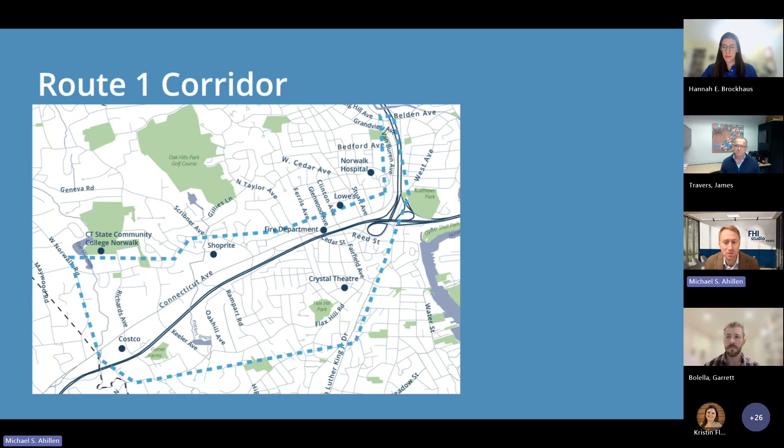Whenever you do a study like this, and you do a corridor study, you need to be considering how the recommendations on a particular corridor might spill into the surrounding network. So there is a greater network which is outlined in the blue dashed lines, but by and large, we're really focusing on Route 1 in our conversations tonight.

Throughout the study, we've really been looking at the public feedback, whether we've received it online or through email or in-person events. We did have a project advisory committee, which met 4 times. It was made up of leadership from various city departments, as well as the Connecticut Department of Transportation and the Norwalk Transit District.

We did a lot of business and transit outreach. We reached out to more than 70% of businesses on Route 1, which is a lot of businesses, I can tell you that. And we spoke with a lot of transit riders who are historically underrepresented at public meetings. We wanted to make sure that we had their input on this because they're key stakeholders for the corridor.

We also did a bus and walking tour where we got a pedestrian perspective of the corridor. This was a really important opportunity for stakeholders to really understand not just what the challenges of the corridor are, but really what some of the opportunities are as well.

We had 2 public meetings. Both of these were in person at Jefferson Elementary. We had the kickoff meeting way back in May 2024, where we initially collected input on some of the challenges facing the corridor, as well as the goals and vision for this project.

And then more recently, in March of this year, we had our public workshop, which was the first opportunity the public saw of our concept drawings, where we focused in on a few different areas and gained some feedback. I want to really note that both of these meetings were extremely informative and resulted in some pretty substantial changes to how we thought about this corridor and how we developed it for this planning document.

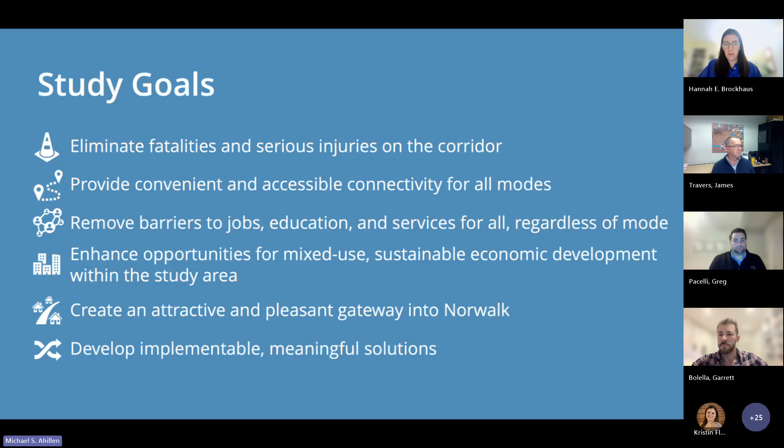And then last, and certainly not least, is developing implementable and meaningful solutions. Implementable meaning something that's really feasible, something that can result in lasting change, and something that works within the design guidance that has been provided for us and adheres to national best practices in street design. So there's a lot of different study goals wrapped into this, which is what planning is really all about.

These are planning level concepts, and there are some considerations I want you to remember as we're showing these. They were developed through extensive existing conditions research. We collected a lot of traffic data and did a lot of signal work. We also gained a strong understanding of the issues, opportunities, and community concerns by meeting with the public and key stakeholders over the last year and a half, almost two years.

We use turning templates for appropriate design vehicles, which is an engineering way of saying we're designing for all vehicles using this roadway. So we're not just thinking about people driving their own vehicles, but we're thinking about public transit, school buses, box trucks, delivery services. Some of these require larger turning radii, which is something we've incorporated into the design. This is something we're required to do as part of the Connecticut Department of Transportation's design criteria, which we've incorporated as best we can throughout the study.

There are general topographical constraints. Unless you've walked or biked the corridor, you probably think of it as being relatively flat in some areas. The reality is that there are some topographical constraints that we need to be thinking about.

We're trying to limit right-of-way expansion to the extent possible. Just so it's clear, we're not looking to expand the roadway in any way. There are locations where there is potential property impact in the long run, but that's something that would need to be worked out in the future. The roadway itself would maintain the same width that it operates in today.

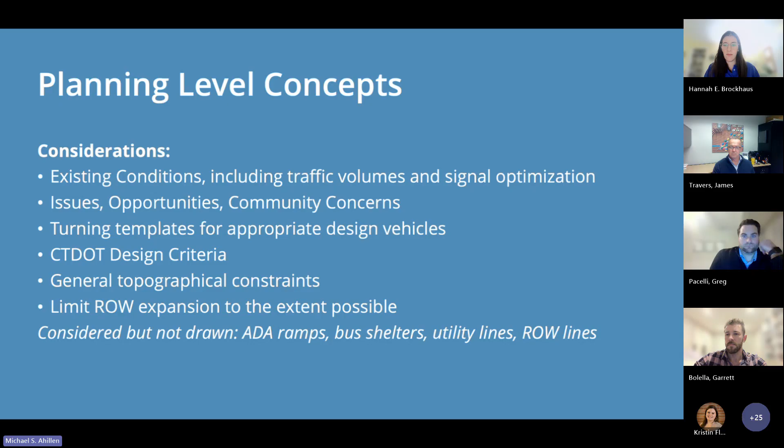As we look at these drawings, you may notice ADA ramps for wheelchair access and stroller access might seem like they're missing. Bus shelters might seem like they're missing too. Just know that they're there, they're just not always drawn. For the sake of clarity, we wanted to keep these drawings as clean as possible. But we'll be integrating ADA access and transit comfort to the best of our ability as projects get implemented.

All right, so let's switch to the recommendations overview. So this is the corridor. On the left, we have Richards Avenue, and just beyond that is the Darien town line. That's the western extent of our study area, going all the way north past Belden Avenue to the Spring Hill intersection. So this is the corridor at a glance.

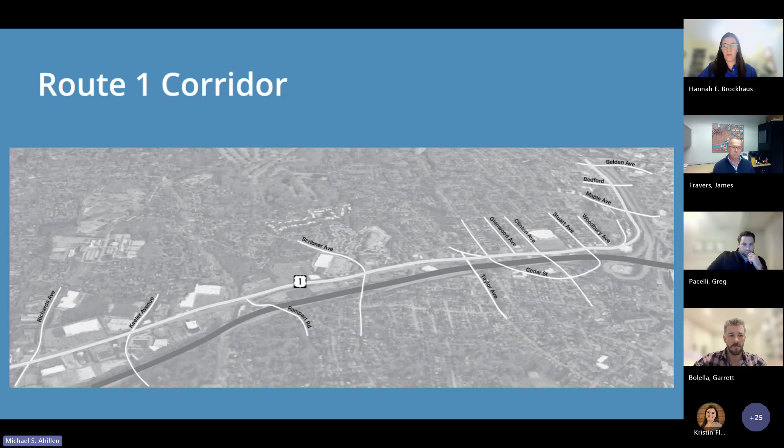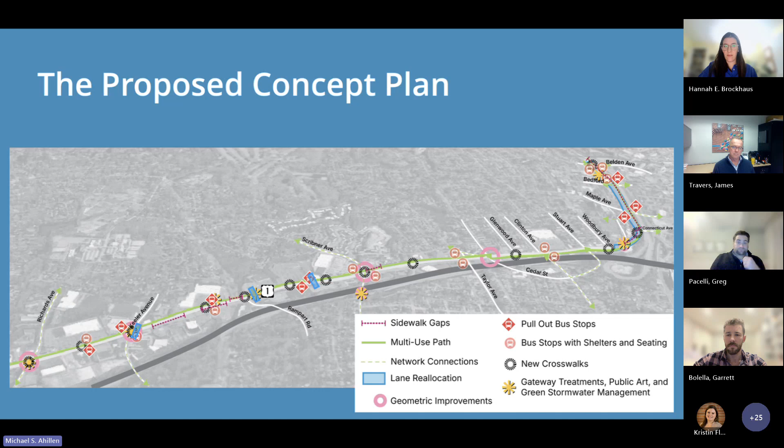This is all of the recommendations thrown onto a single image. As you can see, everything from addressing sidewalk gaps to creating a multi-use path, to transit improvements, to crosswalks, to geometric improvements - all of these are really integrated. What's not shown here is a really important component we'll provide in more detail: the modernization of signals, which is really making a lot of this possible.

So let's start with the pedestrian network expansion, and we'll go mode by mode to make clear what we're doing here and what we're proposing. So, closing the sidewalk gaps. Generally speaking, most of the corridor does have a sidewalk on at least one side of the road. However, it's not complete, so this study is suggesting that we really complete that network. In some areas, it's easier than others.

One of the most challenging areas is just west of the Rampart Road intersection. There's a small but significant sidewalk gap over a creek that would require a new pedestrian bridge to make that accessible. This work is already underway, with funding already started rolling, so it's a nearer term solution for closing that critical gap where people currently walk in the shoulder instead of crossing the street due to the lack of crosswalks.

On the note of crosswalks, you'll see those dark dash circles throughout. Crosswalks are being added wherever possible on this corridor, at almost every single intersection, if they aren't already there. We're seeing a lot of people cross mid-block, frequently at locations without crosswalks, so we're addressing that through design, allowing for more crosswalks so people can cross more safely and avoid mid-block crossings.

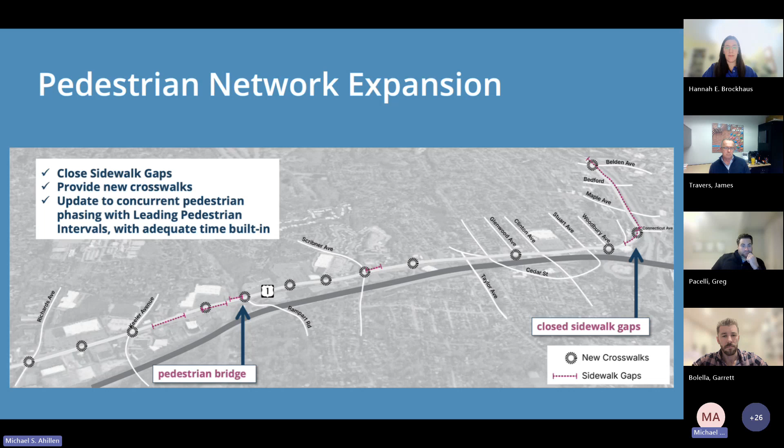What's not shown on this graphic is something called a leading pedestrian interval. These are important, proven safety countermeasures that give pedestrians a little bit of an advance before vehicles start moving to cross the street—maybe a 3 to 5 second head start before vehicles are in motion. This is a really important safety improvement, and something only made possible through the modernization of signals on the corridor.

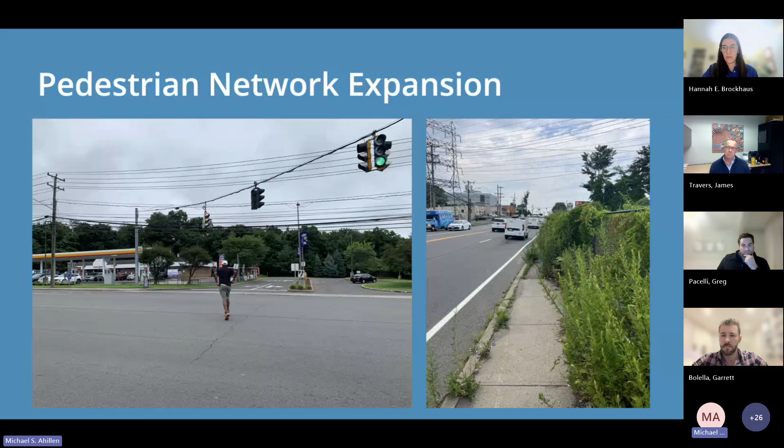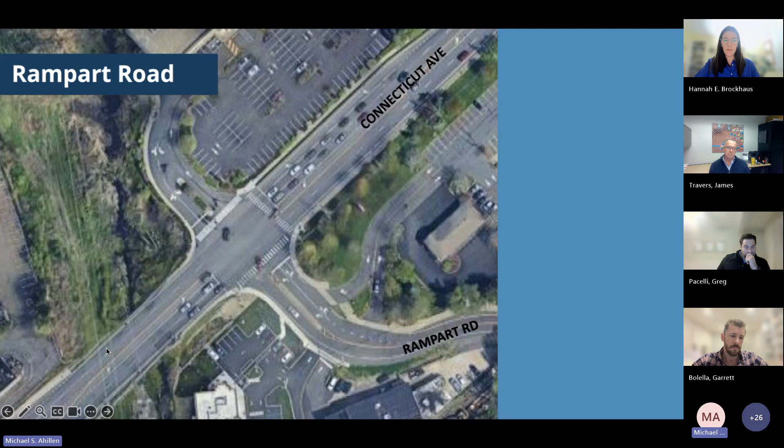This would be addressed through a pedestrian bridge. There's a creek here—even though you might not realize it, this is actually a bridge right here—so putting in a pedestrian bridge would close that gap. Also note that we're adding a crosswalk here, so there's a crosswalk at all 4 legs of the intersection.

And then something you might notice if you have really good eyesight is this right here expands the sidewalk into what's called a multi-use path, so it would accommodate both cyclists and pedestrians on this section of the corridor.

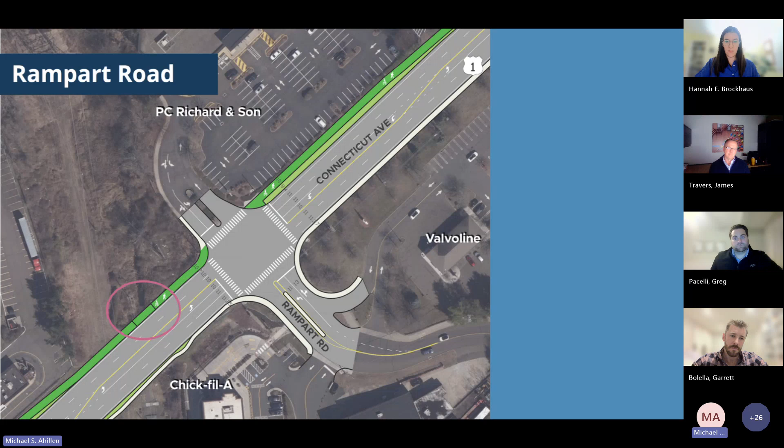So on that note, let's go over to the bike network expansion. One thing I want to pause on here and talk about briefly—if you came to the workshop, and I saw some familiar names who joined us tonight, your advocacy at that workshop really helped shape this plan.

We had read in previous planning efforts a suggestion that cyclists should use Flax Hill Road or some other roadway to go east-west. Although many cyclists will choose that, every single time we were on the corridor we saw cyclists—almost every intersection where we collected data, we had cyclists going through. So we know there's documented use of cyclists on this corridor.

Your advocacy at this meeting pointed out that cyclists need this corridor for the same reasons that drivers do. There are a lot of destinations here—your grocery store, your hospital, your elementary school—a variety of destinations you need to reach on two wheels, in addition to, not just on four. For this reason, we decided to go back to the drawing board and really look for ways to bring bicycle infrastructure to the corridor.

That's how the multi-use path really came to be. In some areas it's a lot easier than others—I'd say the eastern portion, where there's lower traffic and public right-of-way, is where providing a multi-use path is more feasible in the short term.

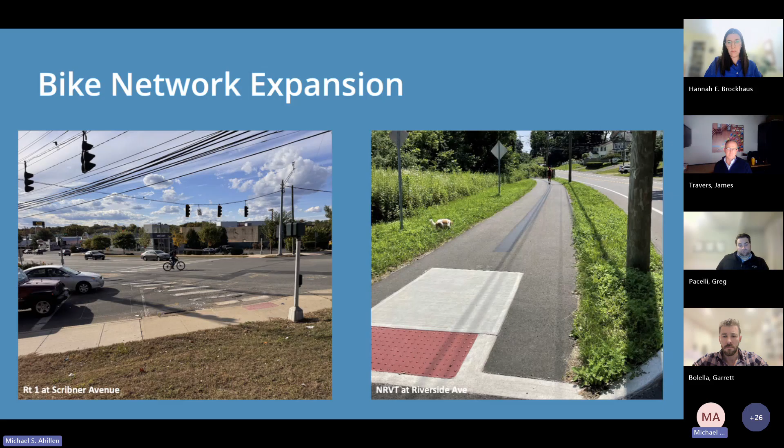Alright, and we'll talk about transit before we switch over to drivers. So improving bus stops, this corridor is really highly used by transit riders, so we're improving bus stops with shelters and seating at nearly every location. There are a handful of locations that are just too constrained, but certain improvements can still be done there.

Optimizing the bus stop locations is something we noticed in the Norwalk Transit District's latest work in their redesign of the network. Some of the routing changed, so we're designing with that, but they also provided guidance about how frequently some of these stops should be spaced.

We're also working to bring those stops closer to the intersections, because what we heard from transit riders is that they frequently have to run across the street when there's no crosswalk just to get to the most direct path to the opposing bus stop. This can be really challenging and presents some safety concerns. So by bringing the bus stops a little bit closer to the intersections, particularly where there are crosswalks, pedestrians and transit users will be able to cross Route 1 more safely.

Another component not on this graphic is the signal component. There's the opportunity for transit signal priority. If you're not familiar with what that is, basically if a bus has passengers and is running behind schedule, it will extend the green or the yellow so the bus can get through and not be stopped at a red light unnecessarily, allowing it to drop passengers off. This can go a long way in improving transit reliability with minimal impact on vehicular operations in the area. It's a really exciting opportunity, and it's something that's already being looked at within the study area.

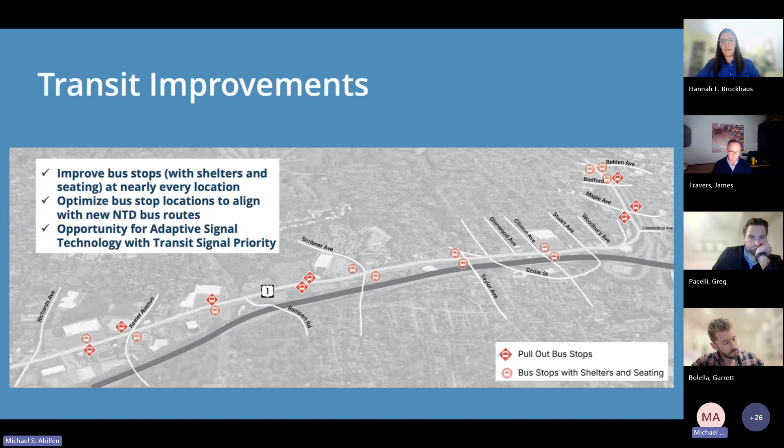Alright, so if maybe you don't ride transit, maybe you don't walk, maybe you don't bike, but you do drive on the corridor, I'm going to hand it over to Hannah, who's going to talk about some of the improvements to traffic operations.

Hi, everyone. Oops, wait, one more thing. Yep, sorry, I forgot about this one slide.

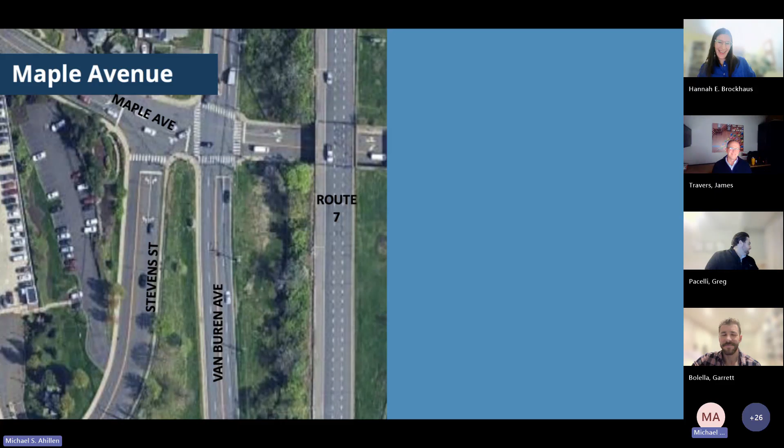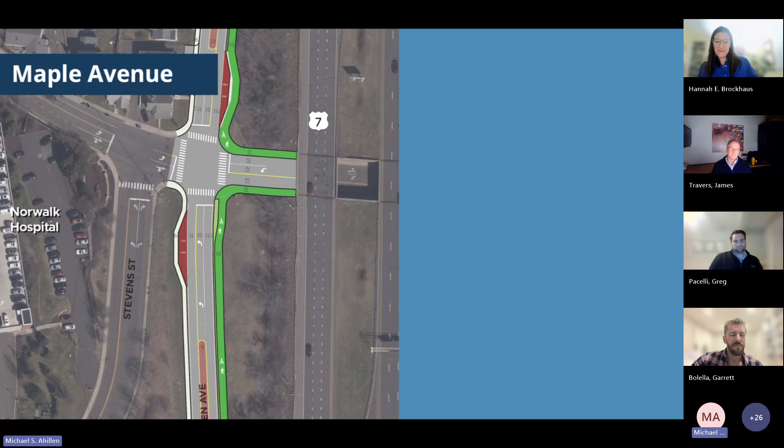So one other thing we're looking to implement are these bus pullouts. Here's an example at the Maple Avenue intersection, which is one of the more popular stops because of the location of the hospital. You can see some dedicated space for bus stops at this location. So sorry about that, but go ahead, Hannah.

That's a great note to end on, because what I want to emphasize from the beginning is that this corridor is, as we've been saying all night, a complex corridor. It manages a lot of regional destinations. It's really important for the city, and all of these important city corridors cross it.

So the series of sections I'm going to walk through—forgive me for going into a little bit of detail despite it being almost 7 o'clock on a Monday—but I want to illustrate the improvements and the close looks we've been able to take at these locations to fine tune what is out there today and allow the roadway network to accommodate more use and more multimodal users without compromising operations for traffic and drivers.

So firstly, from a roadway geometry standpoint, the way the road functions, Route 1 has changed dramatically over the last 50 to 100 years, as increased big box retail has transformed the western portion of the corridor, and as volumes on the city's north-south network have increased in scale and importance.

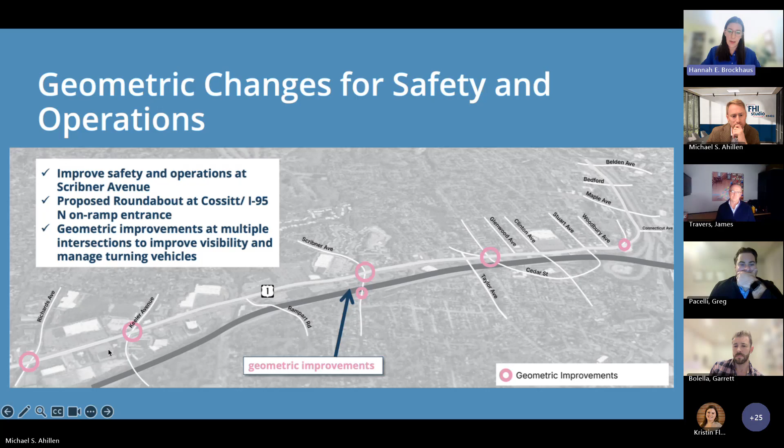This has been really important throughout, but the best example is Scribner Avenue, which is an important regional destination in and of itself because of the traffic flows that use it to get where they're going. There were a huge number of crashes along this corridor, as Michael alluded to when discussing our goals for the study—Vision Zero was our first and foremost design element here. Scribner Avenue wasn't just the top crash location on the corridor, it's among the city's top crash locations overall.

So this was an extremely important focus for us, and we're able to achieve a lot with our concept. I'm not going to go through the full list—it's on your screen—but I'll focus on a couple of key things that make a huge difference, starting with those first couple of bullets.

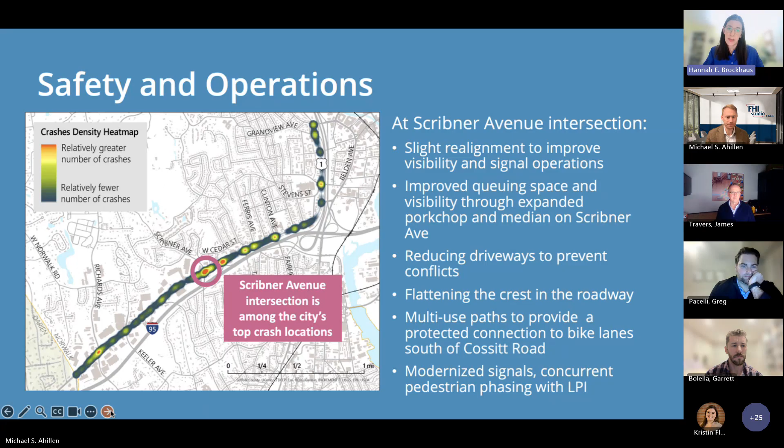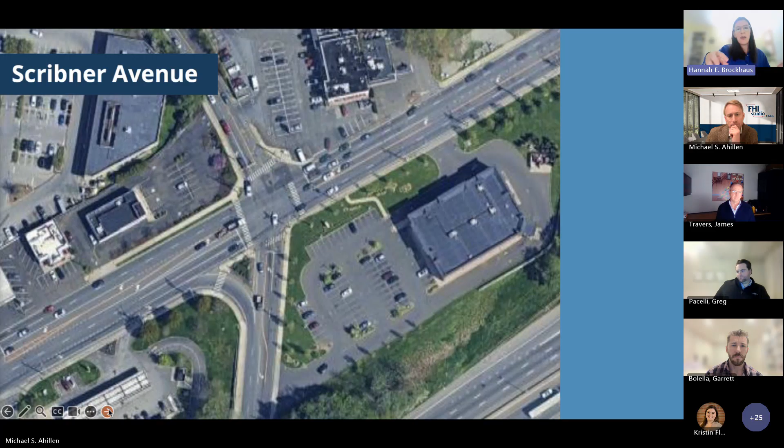One thing you might not necessarily notice driving the corridor day to day, especially if you're passing through and not turning, is that the Scribner north-south alignment presents a skew that makes it more complicated geometrically to accommodate all the modern traffic movements within the signal. That also confuses the turning movement geometry and presents some safety challenges.

So the first thing we prioritized with this design is to slightly realign the intersection, making some of the opposing movements able to operate at once within the signal cycle. That frees up a lot of time so we're able to do more with the rest of the signal cycle, making the whole signal work more efficiently.

The second item I want to call your attention to is the prevalence of angled crashes at this location, which led us to consider what we could do to improve safety for turning vehicles, since that's a major contributing factor to those crash types.

One of the most important movements we wanted to look at is making a left turn going westbound on Route 1 onto Scribner Avenue going south. When making that maneuver, it's sometimes difficult to see where you're going, and there's a topographical issue as well. So by channelizing that move with a new median, we're making it a little more clear where traffic is going and separating those opposing vehicles more.

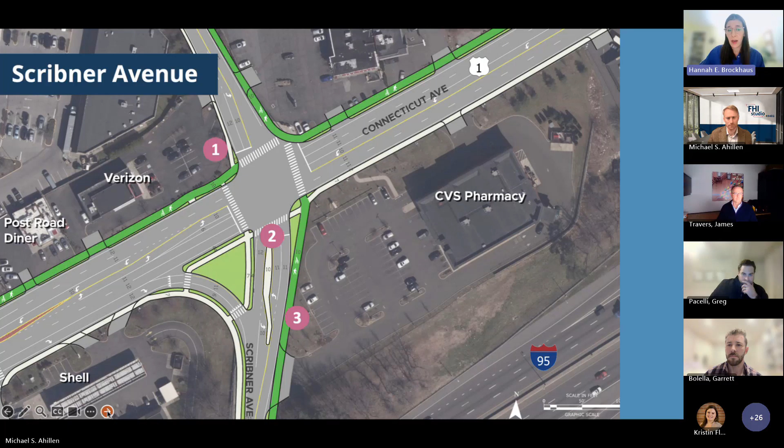Last but certainly not least, as Michael has been speaking to, we want to accommodate all vehicles making all maneuvers and all modes through this design, and we're able to really connect the network for bicyclists and pedestrians through this location by upgrading the signal timing, as well as the new multi-use path on the north side of the street, and connecting to.

The existing Scribner Avenue bike lanes that are a little bit south of 95. The last thing I want to point out with Scribner Avenue is something we've been thinking about at several locations throughout the corridor: the regional flows of traffic and how that changes the dynamic and what we need to accomplish in making these improvements.

We know that Scribner Avenue is really important because for traffic using the western portion of the roadway, a lot of them are using the Scribner Avenue ramps, either exit 14 or the I-95 ramp across from Cossitt Road, to access Route 1.

One of the things we heard early on was that the queuing of vehicles getting onto Scribner going southbound, but having to make a non-dominant left move onto the highway on-ramp, was creating some frustration. We were able to accommodate that move and make it easier to navigate for the heavy volumes of vehicles making that left turn with this new roundabout approach.

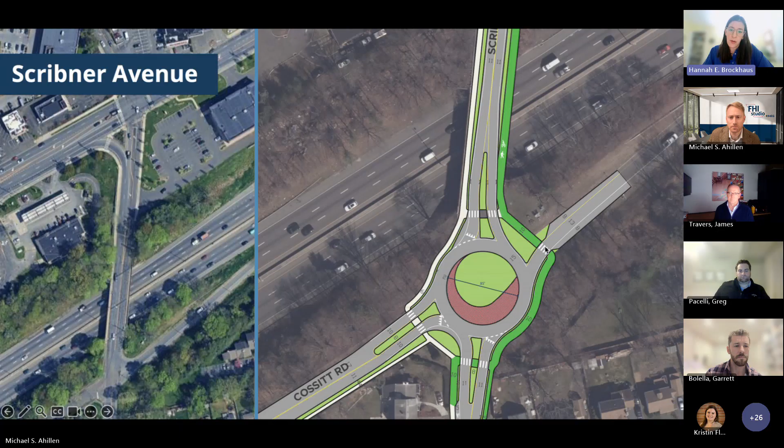For the intersection, which can also serve as a gateway into Golden Hill and Flax Hill, as well as accommodate multimodal users. So that's a lot of detail on that one intersection, but we think it's a really important case study in terms of what we're able to accomplish along the corridor.

With that, I want to transition to some of the other geometric improvements we're able to make. Throughout the corridor, we look to match the existing and proposed and long-range use of the corridor traffic volumes and network connections with the land uses that surround the corridor and the available space on the roadway.

There are opportunities where we were able to look at smaller areas of the corridor to reallocate space that was previously turn pockets or lanes or other sections of roadway. But the key opportunity here is along Van Buren Avenue, as you go around the bend near Elmcrest Terrace and head north on Route 1.

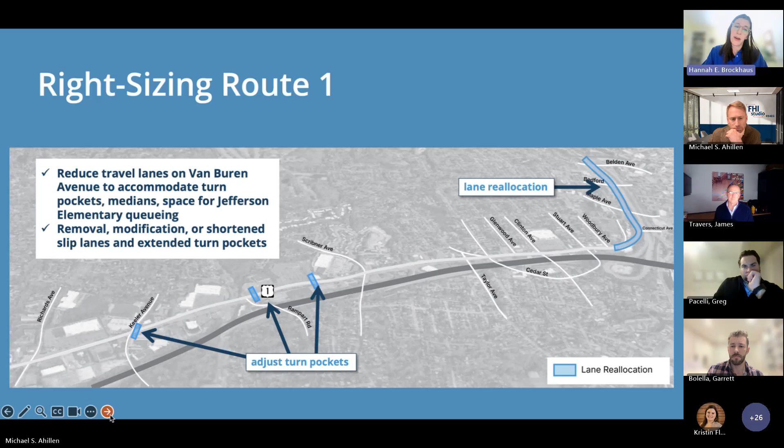This is an area we identified really early on as an opportunity because the traffic volumes using this section of Route 1 are much lower compared to the west. There's only about 13,000 vehicles using that section of roadway, compared to about 20,000 down further along the western portion of the corridor.

Along this section of roadway, you can really see it as you walk or drive along it: the destinations are neighborhood focused, the elementary school, the hospital. This was also supported by data from our origin-destination analysis, where we saw much lower percentages of traffic connected to the regional highway system and regional destinations. So this is really a neighborhood street with a lot of extra capacity.

By readjusting the space for this underutilized corridor, we can accommodate a huge variety of improvements for the multimodal users using the roadway today. We can allocate space for turn pockets to better manage turning movements, as opposed to long through lanes that some people are turning from.

We can accommodate pull-out bus stops and the infrastructure to support them, making transit not just available, but comfortable and reliable. We can incorporate a 10-foot multi-use path and an amenity zone to separate it from traffic, making it more comfortable and appealing for a variety of users and ages, especially given the elementary school nearby. We can also provide a bypass lane to support the queuing that occurs at the school during peak periods.

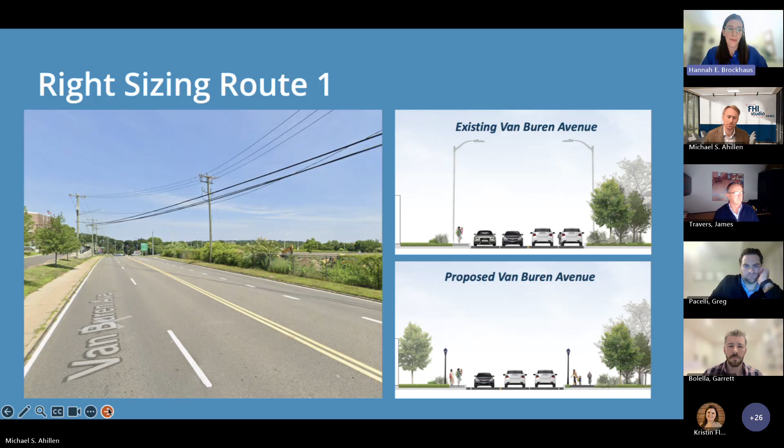This is a huge opportunity we see. We know traffic patterns associated with schools are particular, and there will be needed next steps to look at the feasibility and consider additional connections for the elementary school. That's an early action item on our list. But this proposed alignment really offers a lot of benefit for the currently underutilized space.

As Michael mentioned earlier, I think Marissa's still on, and she was really integral—Marissa at AKRF was really integral in developing and iterating through the design to make all of this possible.

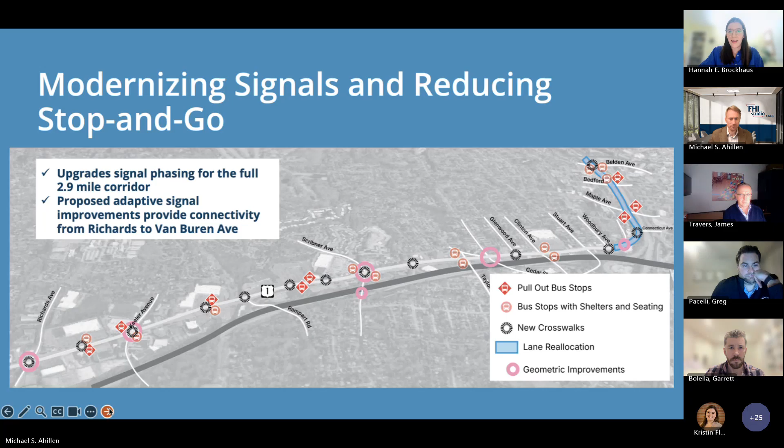One of the key issues we heard at the beginning and over again is that traffic on Route 1 is really unreliable. There's a lot of stop and go, especially between Scribner and about Stuart. Disruptions on 95 really have a strong impact on what it feels like to use this corridor. There's a lot of confusion if you're less familiar with it, and some people say they avoid the area if at all possible because of these pain points. This was a really high priority for us going in.

What we learned through our evaluation is that a lot of the existing traffic signal infrastructure is operating with outdated traffic coordination plans that don't reflect the modern urban nature of the corridor. As I was mentioning earlier, the turning movements are much more complex, and there are more of them than some of this was originally designed for.

The volumes are just higher, and they're reflecting more and more regional destinations. And there are major city streets—so the traffic signals along Route 1, you're not hitting traffic at a side street. Those are also important destinations that people are trying to reach.

Through an extensive review and modernization of the signal timing plans throughout the corridor, we're able to better accommodate regional multimodal demand. This means a lot of different things—we can accommodate those turning movements, and we can match up some of those movements to operate concurrently.

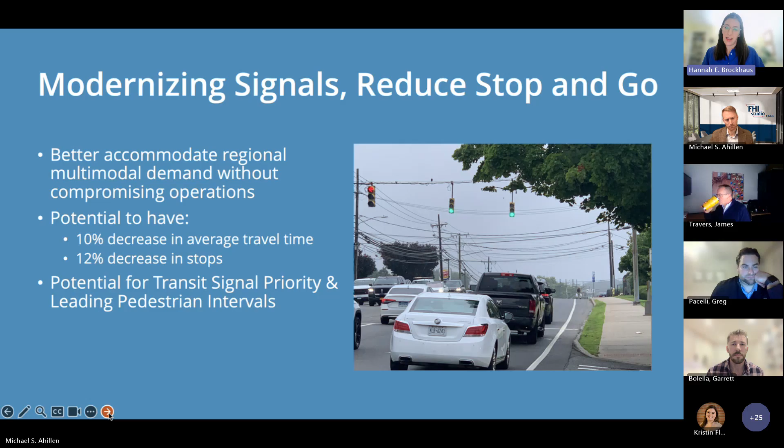Moving through this, the last element of the recommendations we want to highlight, certainly not least, is the experience of what it's like to travel Route 1, and the importance of reconnecting the neighborhoods that currently have this barrier crossing them.

We heard a lot about the fact that the corridor doesn't have that community feel, and it can really feel disjointed and disconnected from the rest of the city, despite the fact that it's a real gateway. A lot of people visit Norwalk because of the regional destinations here that might not otherwise be visiting the city.

So this is the first step, or the front door to Norwalk in many ways. We've got a lot of improvements toward aesthetics and beautification within the plan that range from big to small, with large-scale ideas like a microforest at the end of Elmcrest Terrace, to small-scale improvements like gateways and public art that can reflect the community of Norwalk.

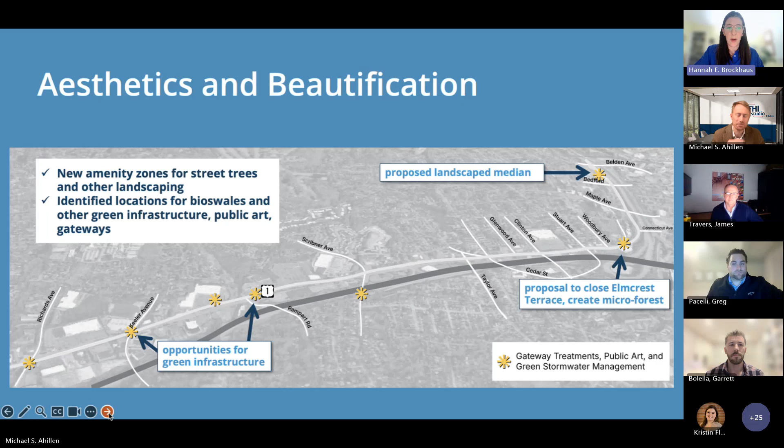One key example that we've heard throughout and kept top of mind is that the corridor really lacks trees, and trees can have a huge impact on the way a corridor feels for all users.

This has been something the city has been focusing on for several years now. When you have more trees, you're more protected from all seasons of weather, whether that's not baking in the hot sun, or it feels a little less noisy, more comfortable to not be in a vehicle, but also it's a more pleasant and attractive environment. So if you're visiting the area, places with trees feel like places that you treat better and have a sense of pride and a sense of place.

Our recommendations reflect this, with opportunities to do that, and we've kept the incorporation of things like amenity zones, which can accommodate those street trees, as an important priority throughout. So all of these recommendations are aimed at reflecting the neighborhood that Route 1 sits within and connects to, and making the corridor as a whole more comfortable, accessible, and welcoming.

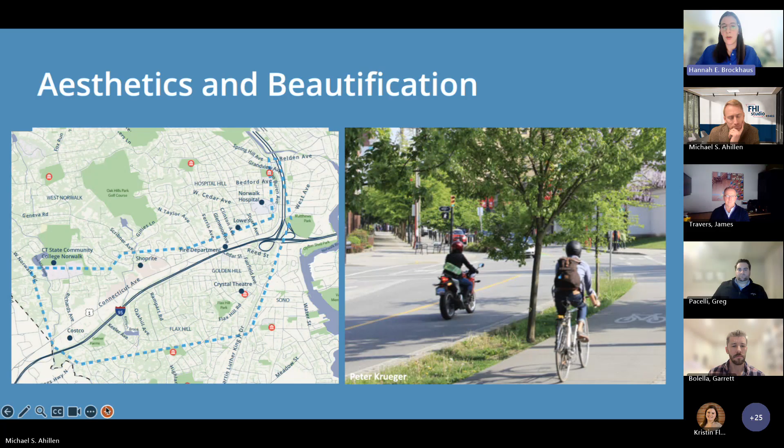So with all of that detail, I'm going to pass it back over to Michael to talk about how all of this gets done. Thanks, Hannah.

As you've probably gathered, there's a lot that goes into planning a corridor like this. When it comes to implementation, we need to be thoughtful about how we go about it. One thing I really want to highlight is that this is a planning study. There are further iterations of design, analysis, and engagement that will need to occur before this can be successfully implemented. So I really view plans as the start of a process, not the end of one.

Working out and teasing out some of the complexity of this to develop solutions that adequately address your concerns is certainly a goal of this study, but also an ongoing goal that is part of the implementation path. None of this is really possible without funding.

So the action plan incorporates a variety of different funding opportunities at the federal, state, and local levels. We don't know what's to come from the federal infrastructure law, which I believe expires sometime late next year. However, there's been a strong focus on safety, and there's a lot of elements in this plan that could continue to be funded if the infrastructure law continues to have that focus on safety, which hopefully it will.

When it comes to the approach, we don't want to see this section of Route 1 all under construction at the same time. So we've divided it into near-term, medium-term, and long-term actions.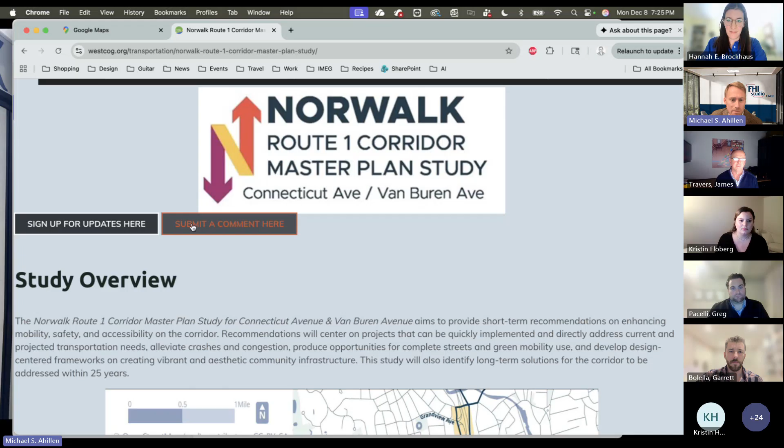I can share the screen real quick. Sure, so here's the project website. If you'd like, you can submit a comment here on the project website, and we get notified when you do. Then the project deliverables - the plan will be posted under that one, and under public engagement you'll see a copy of the presentation and recording. So it's all available on the website. Great.

Okay, we have a couple more questions that came in. The next one is from Emily B. Sorry, I joined a little late, but I have two questions. The first question is, how will improvements on Route 1 connect to existing and planned routes in Norwalk's pedestrian and bikeway transportation plan, including links to neighborhoods, schools, parks, transit hubs, and the Norwalk River Valley Trail?

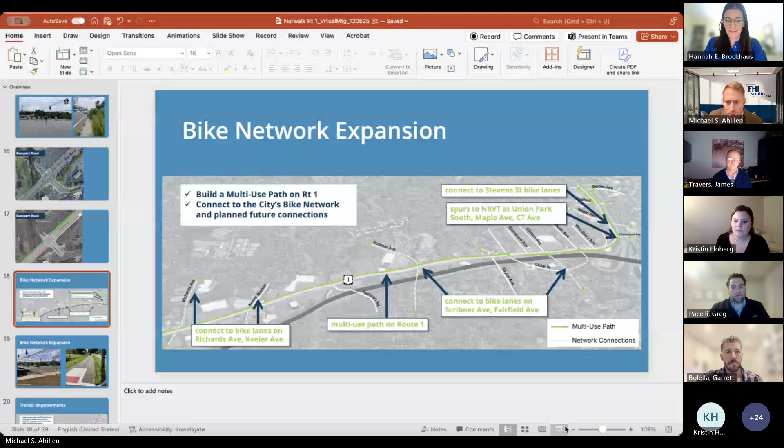So can we go back in the presentation, Michael? Yes, sorry, I was just pulling up the slide. Here we go. Let me make this bigger. I think this is very related, so we can probably cover it in the same answer.

Her second question is, is there a plan to close key gaps in the east-west and north-south bike-walk network using the Route 1 corridor and its parallel streets, Flax Hill Avenue and West Cedar Street?

All right, hopefully I'll answer this succinctly, but please flag if I miss something. Yes, the planning document you mentioned was integral for our initial development of the corridor concept. We did take a look at Flax Hill and West Cedar, and provided suggestions for bicycle infrastructure connections that continue possibly all the way to the community college via neighborhood streets, including West Cedar. The planning document noted a bike connection crossing Stewart Avenue, heading to the Sono area, so we've incorporated that into our planning assuming it will happen.

What this multi-use path will do is connect all of these north-south connections: the existing one at Richards, Keeler Avenue, Scribner Avenue, Cedar Street, Stewart Avenue, the Stevens Street bike lane, and all the way up to the school. You mentioned a variety of destinations, and we think this not only addresses previous planning but also builds even more new connections.

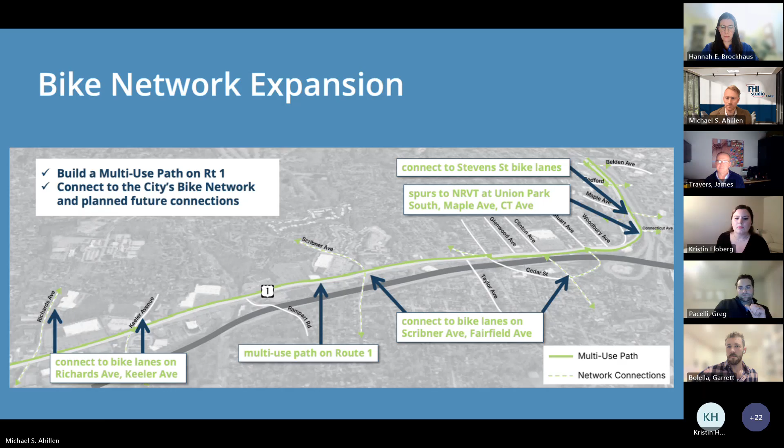This next question is from Garcia. They're asking, has any work been done to address the lack of signs near the school zone? Will all school zone warning signs meet the federal guidelines near Jefferson School and also the hospital zones? Garrett, are you on yet?